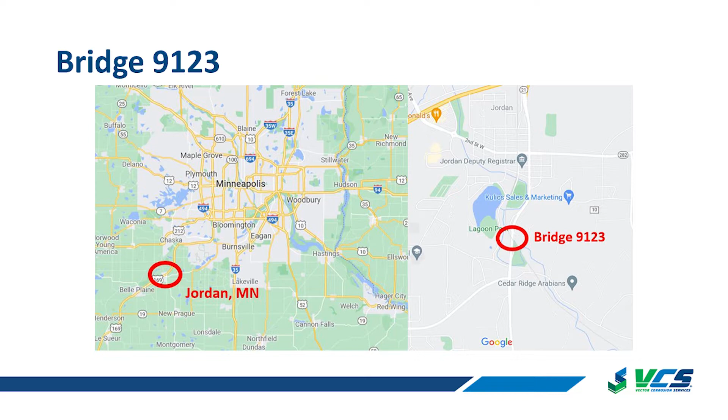So I'll be presenting that. This is a project on a bridge in Jordan, Minnesota, Bridge 9123. Jordan is southwest of Minneapolis, and you can see it's a little bridge over a railroad. So here's the bridge: just a 5-span, 4-pier bridge over some railroad tracks in, I guess, rural Minnesota.

What they did with this bridge is kind of unique. It was part of a trial project. This bridge was originally constructed in 1957. Between '97 and 2000, the substructure had an NBI of 6, and then from 2000 to 2005, that substructure dropped to a 5. So in 2005, they decided to do some restoration of the bridge, and they did concrete repair work of the substructure.

The unique thing was, this allowed MnDOT to do a trial. On piers 1 and 2, they only did concrete repair work. But on piers 3 and 4, they did the concrete repair work, and on the bent caps they decided to use a surface-applied cathodic protection system, to see whether this would add extended service life to those pier caps. One important thing to note is that the concrete repairs were done using shotcrete.

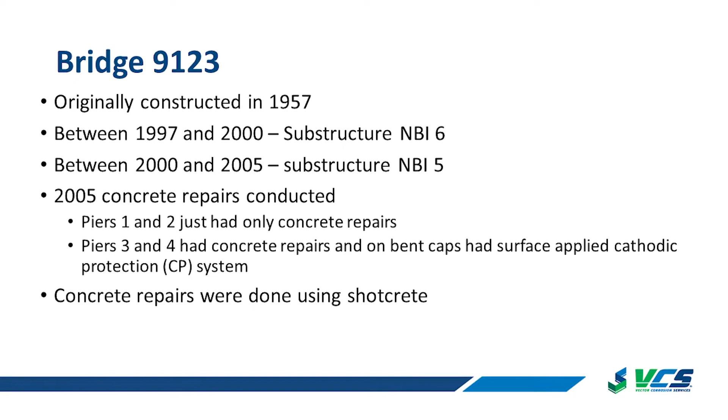Forgive me, but because this is Paul's presentation, I'm going to be almost talking as MnDOT here, from their perspective, as a MnDOT presenter. So what MnDOT was trying to do was trial a new CP product.

You've got to give real good credit to these DOTs, always trying new things, giving them a trial to see if they're going to be effective and whether they can implement them further. MnDOT is always looking for more cost-effective repair solutions, like everyone here in this room. They aim to be progressive and do trials for research purposes and for implementing new technology. However, there are challenges in that.

As I move through this project, these challenges will surface in the conclusions, but there are often difficulties in knowledge transfer. With something like this, there was no maintenance manual or understanding of how the system works. So when we got involved in this project, they didn't really have much information about what the trial had done, because of knowledge transfer issues over the last 15 years. That's a difficulty when state DOTs do these long-term projects: what is the documentation and monitoring of those systems in these trials?

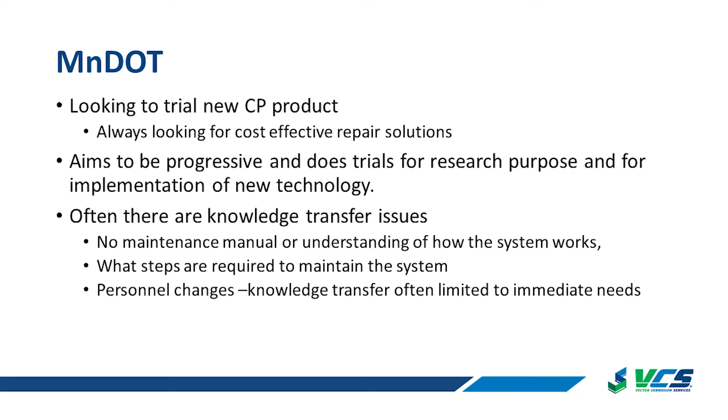What steps are required to maintain the system? And then also personnel changes, right? In 15 years, people change, people move jobs, new hires come in, and knowledge transfer is often limited to immediate needs. For somebody coming in new, you're just going to transfer the immediate things. You're going to forget about this trial you have out in Jordan, Minnesota, from 15 years ago. So these are some of the difficulties in doing trials like these.

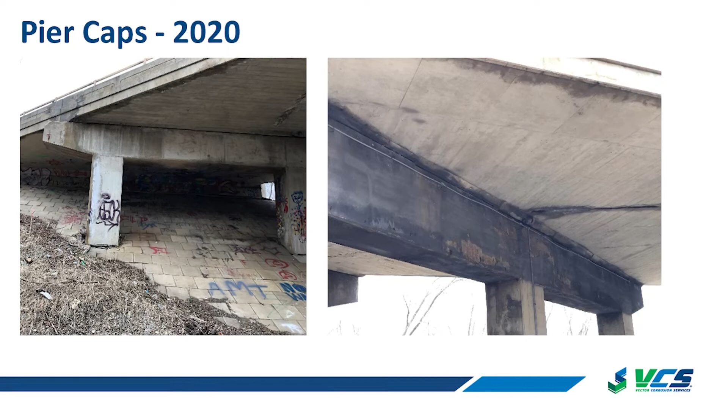So this is what the pier cap looks like now. In 2020 we came out to do a survey. The picture on the left is Pier 1, and the picture on the right is Pier 3. You can see the pier cap on the right has that gray coating on it; that is the cathodic protection anode on the cap, under an expansion joint. And you can see, obviously, there's a lot of graffiti on the bridge.

The system that was used is called GalvaCorr, supplied by Cortec Corporation. Andrew was just presenting on a zinc metallized system, which is melted zinc sprayed onto the surface. This is a little bit different kind of cathodic protection system; it's a spread-on material.

I wouldn't use the word paint, but for lack of a better word, it's a spread-on material like that. It's a 3-component material: a cure resin, and a metal-rich component, like a zinc or aluminum metal. That's a galvanic anode.

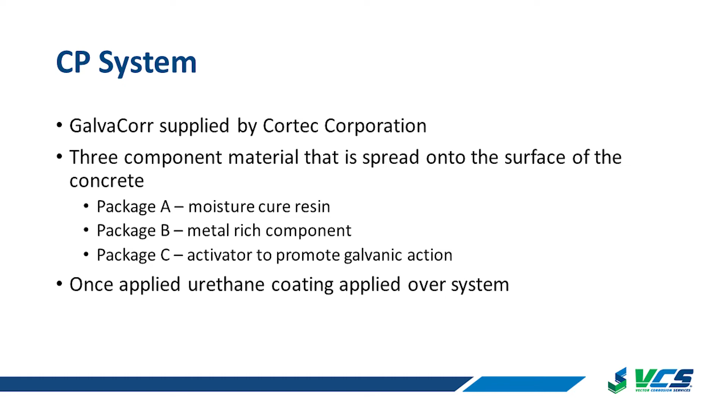And then an activator, something that, when we do galvanic cathodic protection, we want the galvanic system to want to corrode, because that's what provides the protection to the structure. So this 3-part gets mixed together and then applied onto the surface of the structure, and then a urethane coating goes over it. So back in 2005, this was the material that was applied to that pier cap.

Just a quick little background: how does galvanic cathodic protection work? So this is a sacrificial metal. Andrew was just talking about impressed current, where he has rectifiers, he's got a power source. This is a galvanic system where we take a sacrificial metal and directly connect that to the steel we want to protect. That sacrificial metal sacrificially corrodes and gives up its electrons to protect the steel.

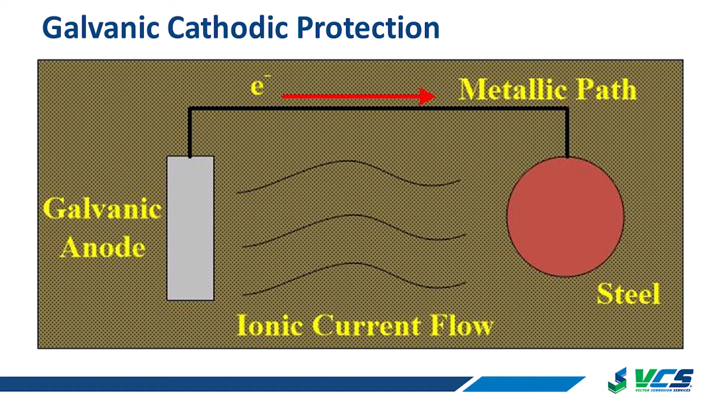So there is current flow through the direct metal path between the steel and the anode, and there's ionic current flow through the electrolyte, which would be, in this case, concrete. So there's this electrical current circuit that's occurring between the galvanic anode and the steel. And that's how the galvanic anode will protect the steel from corrosion.

In 2020, MnDOT asked VCS to perform an evaluation of this system to understand its current status and its effectiveness over the last 15 years. Unfortunately, like I mentioned, the difficulty in this project was that, other than routine bridge inspection on this structure, nobody knew how that system had done. No one had evaluated or maintained it.

So really the goal was to determine if there were any benefits to this product at substantially decreasing recurring pier repair needs. So that was the goal. Over the last 15 years, did it help limit concrete repairs for those 2 pier caps?

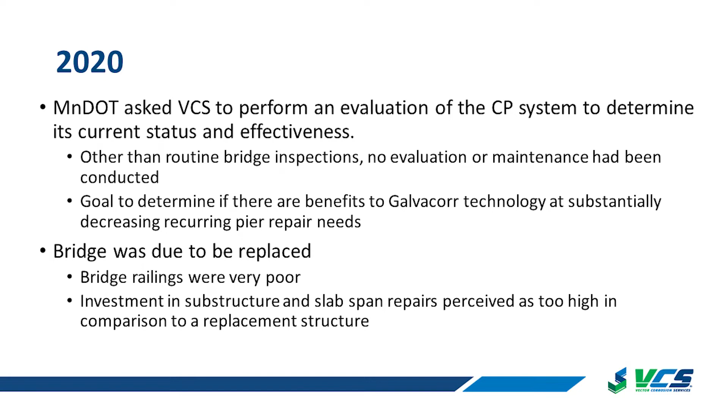The reason this got brought to the forefront was because this bridge was due to be replaced. The bridge railings were very poor, and so effectively the bridge was deteriorating in other places so severely that it really didn't make sense for the DOT to invest in substructure repairs on the piers. And so it was decided that this bridge wasn't worth saving. It's better to just remove and replace it.

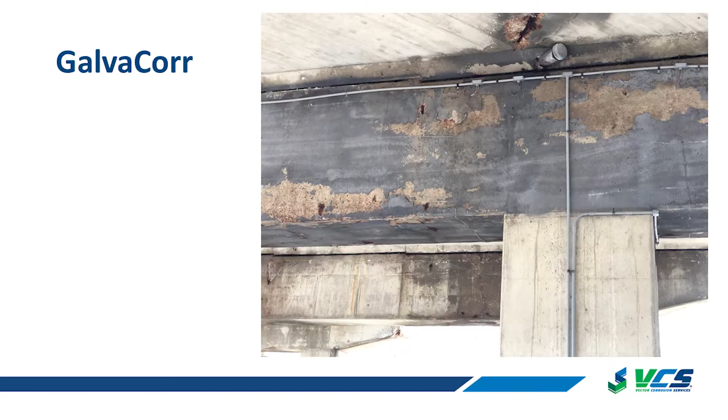You can see the gray material, that galvanic anode. Obviously, over 15 years, we're starting to lose some of it in certain areas. Granted, this is a sacrificial system, right? Sacrificial systems are meant to deteriorate as they protect. There you can see the conduit running to the various zones.

So this was monitored. The idea was there was some wiring for this system so that it could be monitored over the course of its life to see its performance. Unfortunately, that didn't actually happen, but it was set up and wired to do that.

You could install this without monitoring, so effectively you could directly short this system to the steel and not have any external cabling or wiring, and let the system work as it's intended. But because of monitoring, you effectively isolate the steel and anode and then go through a circuit. Again, here's some other photos.

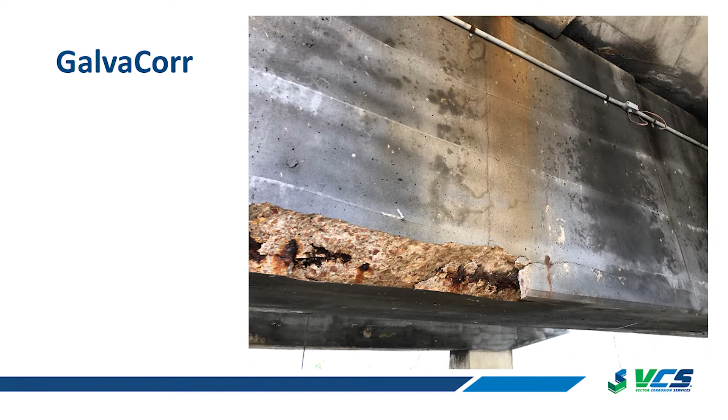Here, again, we can see water staining coming down from the deck joint. So obviously, that's the source of the problem for these pier caps: expansion joints, de-icing salts coming down. We see some corrosion spall there, so that's not a great sign. Okay, we did have some corrosion in this pier.

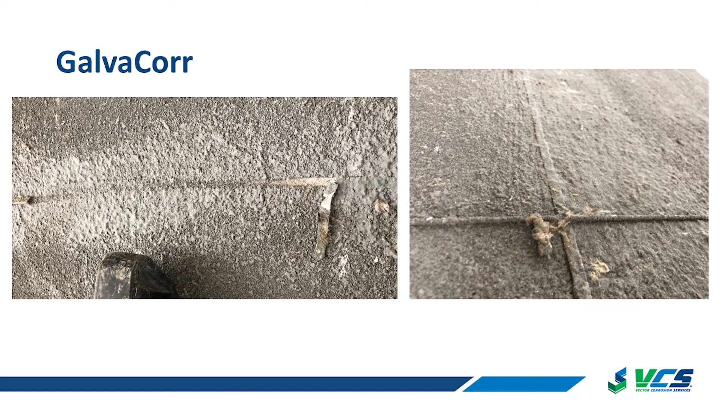So how the system works is that galvanic anode is sprayed on the surface of the concrete, but this system has distribution bars to help even the current flow between the anode and the steel. And so you can see in the photo there those metal strips. It's a unique feature of this product, that it has these strips that are used to connect to the reinforcement to help even the circuit resistance and distribute the current flow.

Because as that galvanic anode starts to degrade, you're going to get higher resistance in areas. So that bar, we would call a distribution bar, was there to help distribute that. But in some areas, we were seeing that failing after the 15 years here. So the monitoring system, obviously this is from 15 years ago. This is galvanic. It's a very basic monitoring. Effectively, they had the wiring to a simple little analog amp meter.

And you can see we've opened a box here on the structure. You've got the red wires for the anode and the green wires for the steel connection, and then effectively current flows between the anode and the steel. And so with that amp meter, you're supposed to be able to measure that. Now, it wouldn't be surprising that over 15 years that amp meter doesn't work at all. It does read 0. We did take our own meters and check everything. Unfortunately, it did also read 0, so there was no current flowing at the time, but I'll get into that here in a sec.

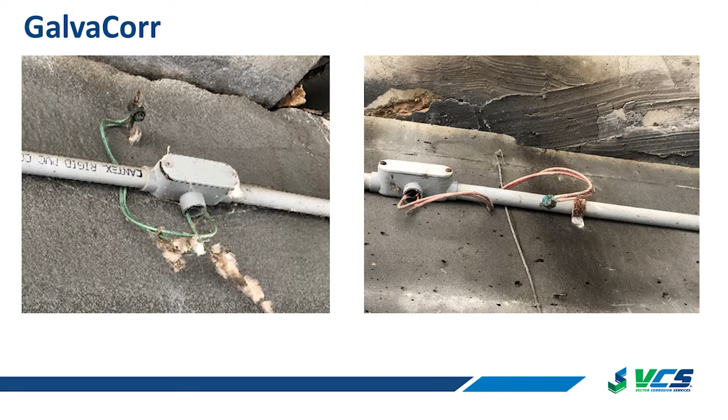You can see, unfortunately, with a lack of maintenance over those 15 years, without somebody looking after this, there were some issues. Here's a conduit, and we see a T-junction there, and I don't know if there was an existing piece of conduit that came down to that connection, or they just had the wires exposed like that, but that's obviously not a good sign. Some damage to the conduit, some damage to the wiring.

And that was uniform, so we think that when they installed it, they didn't have really good conduit routing, so they just had these T-junctions and then ran the wire externally. That was 15 years ago; that's really not good practice these days. If someone's installing CP these days, they would have conduit runs all the way to the concrete so that all those wires are encased and protected. Because if you have wires exposed like that, they can get damaged, and that'll affect the performance of your system.

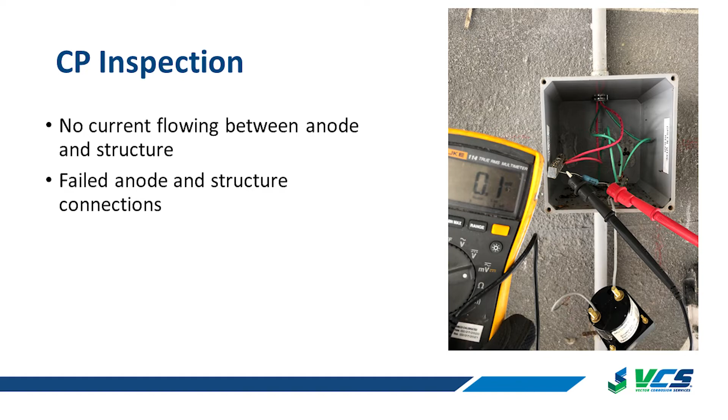So I showed that amp meter. We got our actual meters out, and unfortunately, when we came to site 15 years after installation, there was no current flowing between any of the anodes on Pier 3 or 4. Inspection of the system identified that most of the anode and structure connections had failed because they just weren't properly connected and durable for a 15-year service life. So some issues on the initial installation affected durability. Those things can be picked up if you're monitoring and maintaining a system, but unfortunately that wasn't done in this situation.

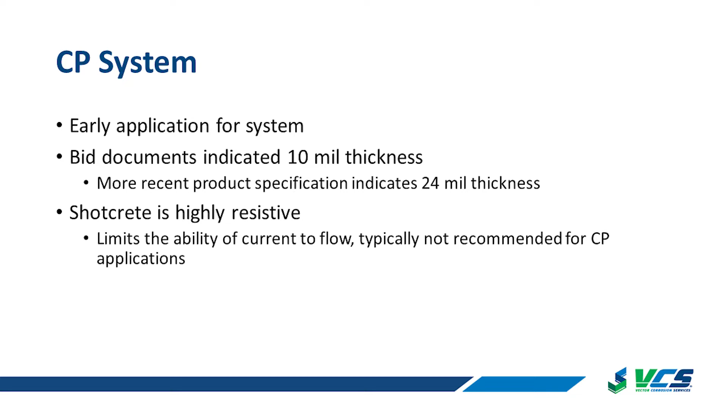One of the difficulties was that this was an early application for this galvanic system. It was one of the early trials for it, so they didn't quite have all the bugs worked out. They only put 10 mil thickness for this coating in the original bid documents, but specifications for this product nowadays call out for 24 mils. So we think that in the early days, they went too low in a trial and then realized that they needed a little more thickness for durability of the galvanic anode. Thickness on these 2 piers was lower than it probably should have been, so that probably hurt some of the durability.

One thing too, I mentioned shotcrete. Shotcrete is really highly resistive because it has a lot of silica fume in it. So whenever you're doing cathodic protection and there are shotcrete repairs, that brings a CP person a little bit of alarm, because we've got to push current through the concrete. So if we have really high resistive concrete, that'll affect the performance and current flow from that anode, because of the high resistivity of that material.

Typically, if you're going to use shotcrete, then we have to do some pre-packing of anodes or some low resistive paths to help guide current through the shotcrete, or use another type of material. So probably 15 years ago, the people doing the concrete repair work weren't coordinating with this one trial on these 2 piers, right?

They went out, did the shotcrete, did the repair work, and left, and then somebody else came in to do this trial. And so there was a lack of coordination on the repair material. And so that kind of put the system at a little bit of a disadvantage there. We're not seeing current flowing from this anode, but I don't want to say that the anode didn't work, right? There were some issues that really didn't set it up for that 15-year service life.

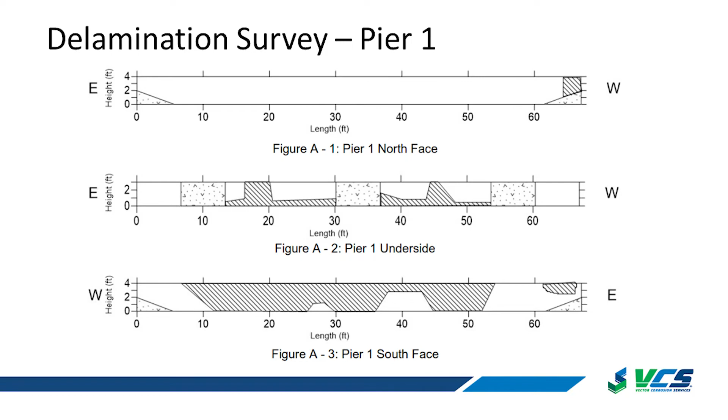We also did a delamination survey, right? That's kind of the big key here: did the system work or not? What are the current delaminations in 2020, when we were out there? Was there more delamination on piers 1 and 2 versus 3 or 4, or was it relatively the same? And so here, this is just an example of the delamination survey from the 3 faces of Pier 1 cap. So you've got the 2 vertical faces and the underside, and the hatching is where the delaminations are on that one.

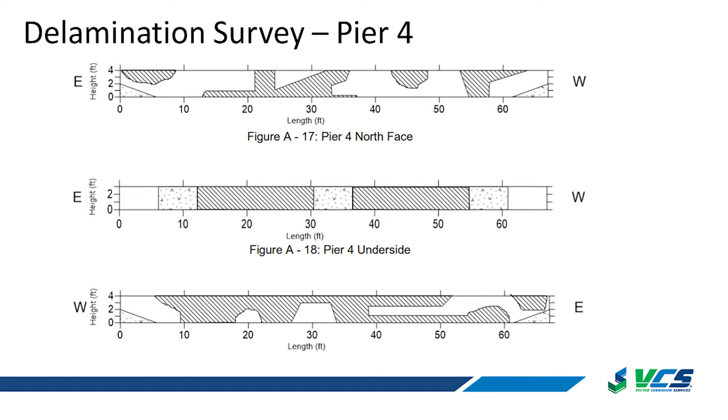And then if we go to Pier 4, which had the CP, you can see there's pretty significant delamination, effectively the same amount of surface area, unfortunately. So if I take just the south face for Pier 1 and Pier 4, effectively there's really no difference between the two. So that's an unfortunate sign that it didn't really provide much benefit. We still have a lot of concrete repair work there.

And just looking at overall, we see that Piers 2 and 3 were very similar, and Piers 1 and 4 were very similar. I don't know if there's some geometry situation on this bridge that made Piers 1 and 4 different from 3 and 2, but they had expansion joints over them, and so de-icing salt's coming down.

So unfortunately, based on just the sounding inspection, this system didn't really provide a lot of benefit. But I want to make sure that the caveat is there that it wasn't properly maintained. There were some issues with applying shotcrete, so current flow problems. So was this really set up the best way at the beginning? I would contend probably not.

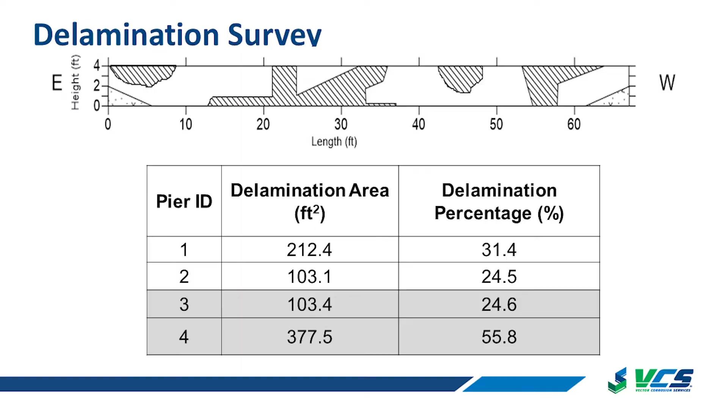So we also did some corrosion potential measurements to look at corrosion activity on the elements. Corrosion potential measurements are per ASTM C876. What we're doing there is we've got a reference electrode, and we're measuring the potential of that reference electrode against the steel reinforcement. And the potential will tell us the potential risk for corrosion activity of that steel reinforcement.

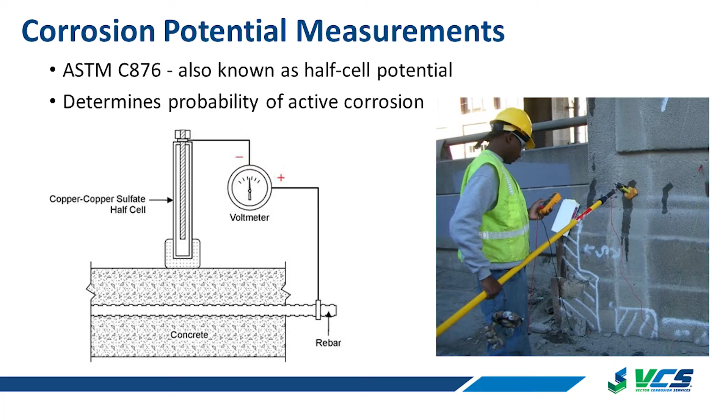And so you see here this gentleman in the bottom right corner, he's got that reference electrode, and he's looking where the active corrosion is beyond where the concrete is delaminated. The white hatching there, you can see we've already gone and done a delamination survey. And by the way, this photo is not from that structure. It's a different structure, just for example purposes. So obviously you have where the concrete is delaminated, but you also want to know where the active corrosion is beyond the delaminations.

So this bridge was very severely deteriorated, had a lot of chloride exposure over the years, and really hasn't been maintained since 15 years ago. So that's again a driver for why this bridge had to be replaced. And so, again, it puts it at a disadvantage. In conclusion on that evaluation of the CP system, unfortunately, it didn't really provide an extension in this situation.

This was something that we'd hoped that, cathodic protection really does work. It provides protection, but the system connections weren't really durable and had early failures. So unfortunately, some things that happened during the initial installation didn't really set it up to last the 15 years. The conduit runs, the wiring that was exposed, those weren't really durable, didn't last the 15 years.

And then the lack of inspection and maintenance, right? Anytime you have kind of a system like this, it's important to go out and inspect it. I mean, not super regularly, but fairly often, just to make sure that things are working properly. Those connections can easily be fixed. Those aren't detrimental. You have a structure connection that goes bad, you can get that back in relatively simply. So, had there been some inspection and maintenance over the course of that life, they could have gotten that system back up and running to provide some protection.

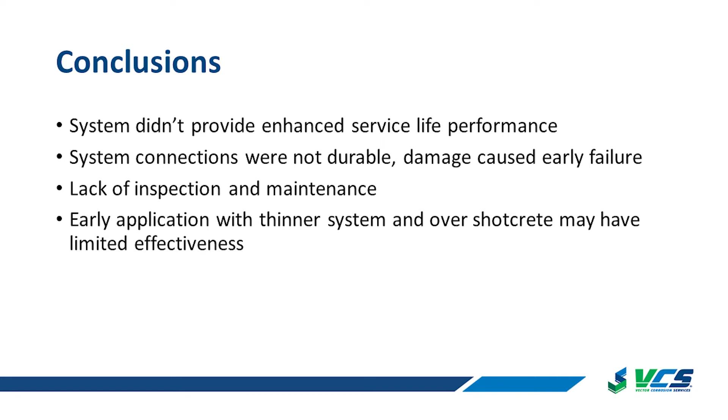And then also some issues at the beginning with probably a little bit thinner application than was really recommended, and the shotcrete, which limited the galvanic protection flow. So those are some things that allowed it not really to perform as well as it should have.

What did we learn from this? I think what Paul really learned from this is better tracking and monitoring these trials, right? If you're going to spend the money to try to trial something and potentially use a new product for mitigating damage, it's important to track and monitor these, kind of understanding the monitoring and maintenance requirements of a system.

Some DOTs don't have a lot of experience in cathodic protection. So when you get a system like that, understand what the monitoring and maintenance requirements of that system are. Some systems have a lot of monitoring and maintenance requirements. Some have minor ones. But really understanding those requirements is really critical to make sure that system will be durable. And like I said, external components, when you're monitoring, are a potential weak point and need to be inspected and repaired as they deteriorate.

Unfortunately, this application didn't lengthen the service life of the bridge. Other elements actually controlled the service life of this bridge anyway. So even if the system had worked on the pier caps, they still would have had to replace this bridge because railings and other things were deteriorating faster. And so really the takeaway there is right-sizing the service life investment amongst all other elements, right? If you spend all this money on these pier caps, but then the bridge railings cause the bridge to get replaced, well, even if the CP system had worked, that really wasn't that smart of an investment.